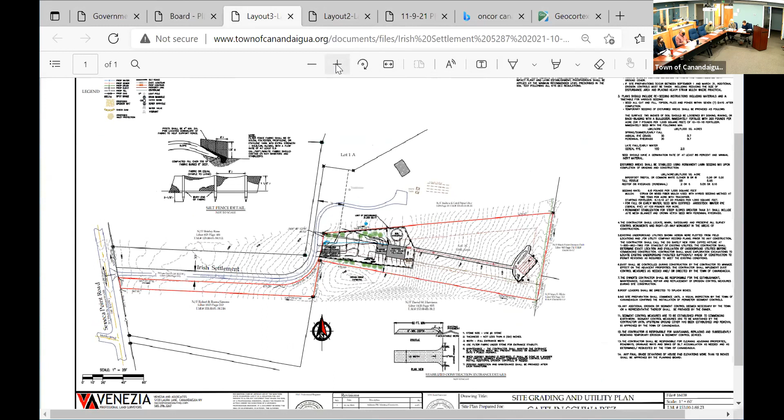We have a new public hearing for Venezia Associates representing Leo Genecco and Sons, owner of property yet to be determined on Canandaigua Farmington Town Line Road, requesting a single stage subdivision approval to create 2 lots on Mobile Road. I will open the application, the hearing.

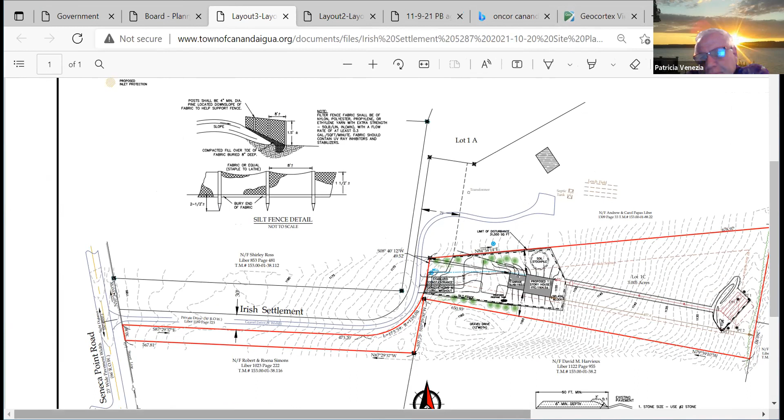Someone here want to speak on behalf of the applicant? I'm here. Rocco, can you hear me? You got the Irish settlement plan up. There we go. Okay, you guys can compete. Who's going to talk? Rocco? I'd rather listen to you, sir. Thanks, Chuck. Okay, Rocco, you got the floor.

Okay, you'll have to excuse me, I thought we had approval of this, but evidently there were quite a few items that had to be addressed, and I believe I've addressed them.

One thing that's peculiar about this is that I keep getting the same comment letter. I make the corrections, I get the same letter back. So I'm not sure where we stand in terms of if we have to add something to the map, or if we're there, or maybe somebody on staff can clarify. But what we're trying to do is add 2 more lots to the end of Mobile Road. We're showing a hammerhead that's temporary because this is going to connect to the new road that's going to be built in the future. So that's where we stand right now.

Somebody, do you want to bring something up while we're here? I'm gonna let Lance do that. So I might need some correction if I'm wrong, but my understanding is that the approval expired. Is that correct, Shauna? Yeah, I will go through the procedural if you want to go through the comments. Sure.

That you had, that's why we're back here. So Rocco, the one question we need addressed on the plans, and I can speak to you offline after the meeting assuming everything moves forward, is that as part of the original approval of this board, remember there were 2 lots being proposed along Mobile Road. As part of that, there's an extension of Mobile Road required to service those 2 lots. In doing so, we need to bring that road up to fire code, meaning it's got to terminate with a hammerhead. That was all being shown before, that was all provided.

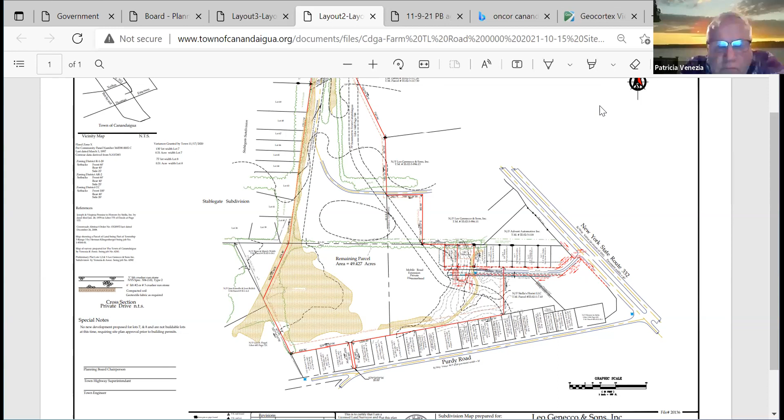We just have to make a few additions as requested by Lance, and if they can make those and get it signed - it's not a different plan than what was before this board. They've been working to address the conditions of approval, and as part of that process time has lapsed, which has required them to come back to this board to get a reapproval, essentially for the same project.

The one item that was missing was we required a 60-foot right of way over Mobile Road for future use. Currently it's shown, but it doesn't connect to our existing easement, so we don't want a gap there. I've asked Rocco to revise the plans to show that 60-foot wide right of way going over Mobile Road all the way to our filed easement that runs north to south from the Genecco property, so there's no gap and no need to go back and get an easement in the future.

Let's move on then. We're ready to take care of SEQRA. It's an unlisted action. I note in part one of the submission, nothing was filled out.

There's another one in the application file dated September 18th, 2020, the one that you gave it to. That's filled out completely and signed by Venezia Associates. You completed part 2 and part 3 - yes, it's essentially the same part 2 and part 3 that was previously completed by this board, just redated.

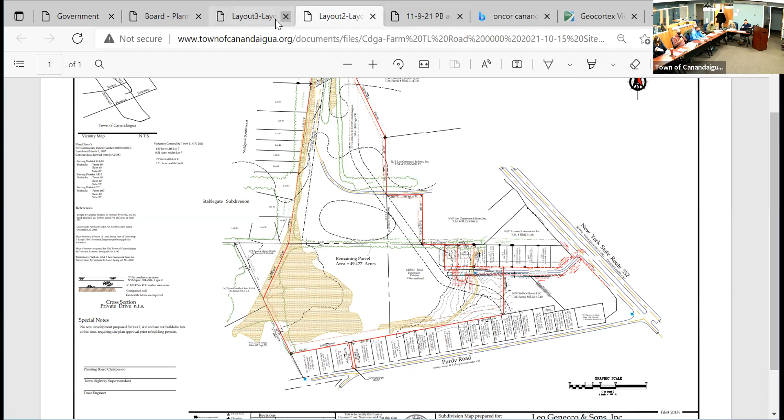We have a new site plan from Venezia Associates representing Caitlin Schwartz on the property at 5287 Irish Settlement, seeking a single stage site plan approval for the construction of a new single family dwelling.

Wi-Fi, where does he zoom in from? I think, let's see, are you in the bunker? He's on the lake. Rocco, can you hear us? We can't hear you.

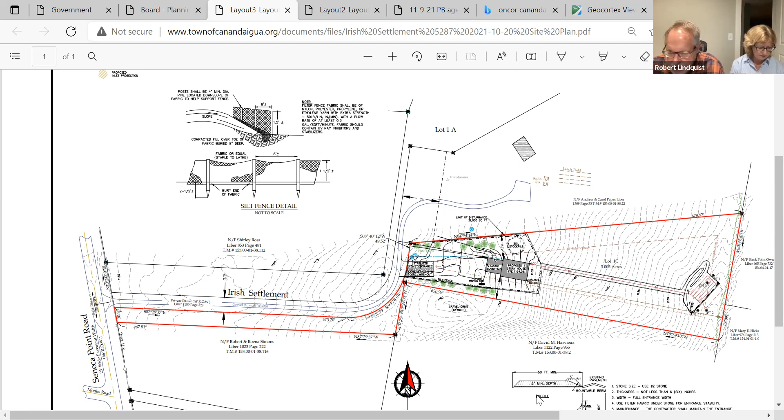Okay, I think we have another neighbor here. I own the driveway. You own the driveway? I'm sorry, what was that? Sir, would you come to the podium and give us your name and address? And hi, Bob. Hi, Barb. Hi, Andy. Hi, Andy.

I own Pat McCabe's old cabin. I'm Andrew Papas, 5285 Irish Settlement. I live in the cabin that Patrick built, and Bob's my neighbor now.

The day of closing, my lawyer called and said there's an addendum: that driveway you have to share with Lot 1A and Lot 1C, the Schwartz's property, and there's an addendum that we're supposed to share one-third the cost of the driveway maintenance each. Bob owned the property for a while, but when he built the house, he took over his share of the maintenance. He's done a very nice job, by the way.

I haven't asked the Schwartzes for any maintenance at this time because they haven't started using it. But that's part of the deed—it says you can't park, you can't go fast on it. Patrick put a lot of conditions into there when he made the subdivision. Even with snow plowing, we have to pay one-third each, but Bob and I have split it because the Schwartzes aren't there yet.

So I have some concerns about the property and the map. Well, should I address those now?

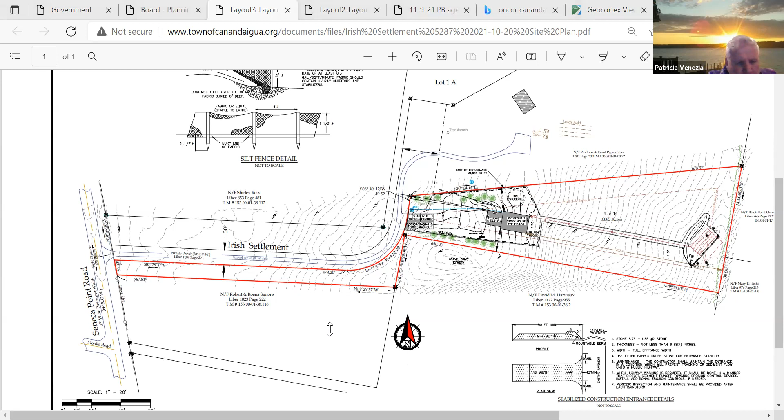Well, again, if the map is accurate—Andy, our obligation is the minimum setbacks. Now if they moved it, as long as it's within the minimum, that's fine.

You back with us, Rocco? No, I'm not here. All right, hang on a second, I'll call on you. That's right, hello. Did they adjust the map? It's adjusted.

Okay, I wanted to put a question. How far is their septic from my well? My well is shown on that map, I didn't see it. I'm sorry, your septic to where? From my well to their septic. Where's your well? Oh, here.

No, that's the leach field. Is there a septic up there? No, the septic is way in the back. They have a distribution box, here's a distribution box, here's the leach field. It's the proper distance away, it's gotta be X number of feet away from the well, and it is. You're good.

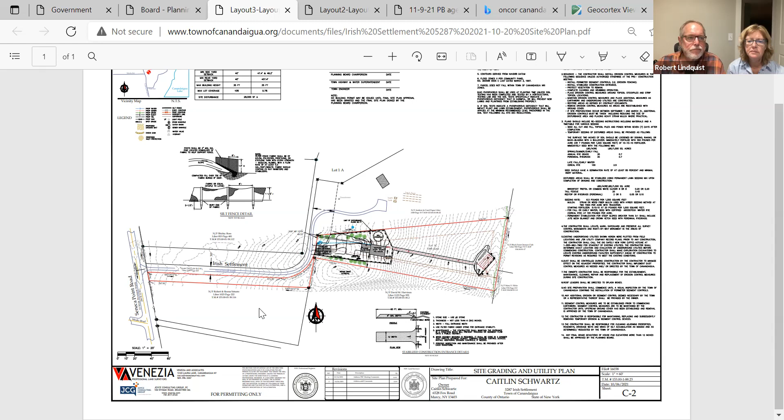Oh, I see, that's typical elevation. Yes, yep. That's what's gonna be a walkout.

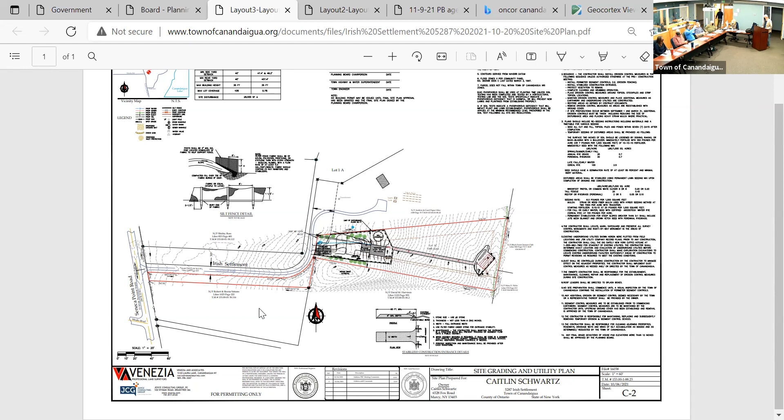Sure, I believe in the plans, if I remember, it says those trees are gonna be maintained. Didn't it say in the plans, the trees both on the north and south side are not gonna be removed? They show them right there on the plan. They're showing it. Both say pine trees to remain, to remain.

Hey Rocco, Rocco, I'm hearing you. He's talking to- no, oh, talking to Lance. You're talking to Lance over there.

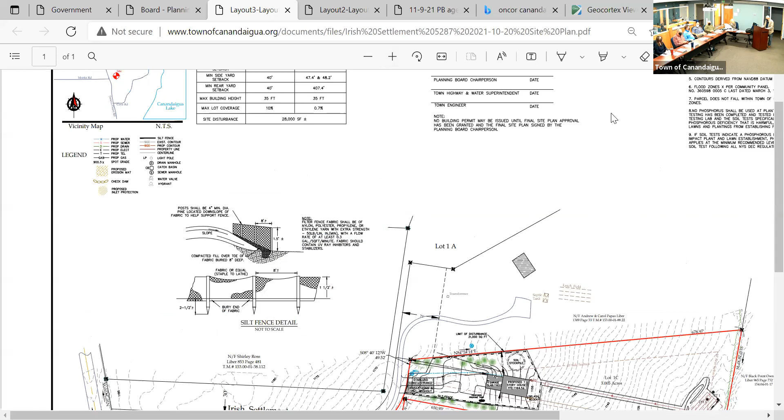All right, yeah, so the plans already indicate that they're gonna remain. They're not gonna take those down. I think you responded to my questions quite well. Thank you, guys, very good.

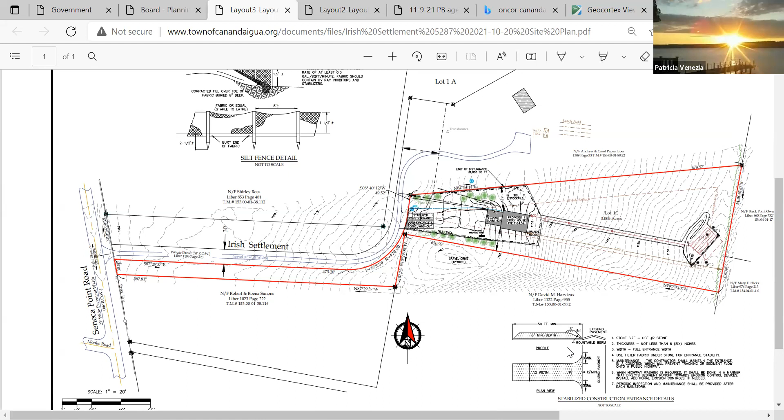So folks, this is kind of a little bit of a redesign. I think you've seen it before. The house sits up front. We got a stabilized construction entrance at the house site. It's a shared driveway, I know there's been some talk going on about that, that's been a few years. And then the septic system is in the rear, way back, that's where we got a decent area to put it in terms of soil. So pretty much that's what's going on, pretty straightforward.

So Rocco, this is Gary, just for the record, the plans show that the trees on the north side and the south side are gonna remain, those pine trees are gonna remain? We planted them for privacy on purpose a few years back, so. Yes. Okay, thank you, max height.

Rocco, what's your max height of the building? I'm not sure exactly what it is, I don't have the elevations in front of me, but I know it's under 35 feet, and it should say up there in the block attributes. It should have it, it's on there. Hold on, I think- yeah, it says, it just said 35.

Less than 35, this is okay, right? Yeah, okay good. Oh, I didn't see this, I think it's a single story structure now, so it's not gonna- right, it's gotta get reflected on the plans, Rocco. Yep, okay, so I thought-

How about Chris Jensen, he had an email he sent out on the 19th of October. You want to read that into the record? Is it defined? Yeah, we're in the findings.

Perc test, yeah, it had to do with the pool for fire. And road driveway size.

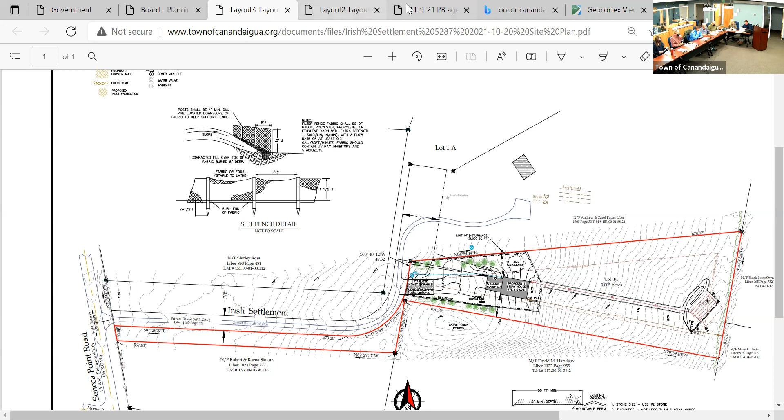Oh good, this is dead on the right. Okay folks, the scenic viewshed overlay district, did everybody read that? Yes. I don't like it. All right, well that's what I was gonna say, tell me what you think of it. Some comments, yeah, my property's on it.

Is it really? So is mine. Johnson Road? So is mine. Yeah, it's I'm not really gonna subdivide mine. Proposal, you could all read.

It would essentially make anything in that purple area subject to a minimum 1 acre lots, and would more or less preclude conservation subdivisions, the way I'm reading it. No, well, as long as the conservation subdivisions were split into 1 acre lots, they can still do it.

And as I read it, they couldn't put multiple - you missed, it couldn't be more than single family dwellings here, not multiple family dwellings. No, they weren't. Oh, you're right, you missed it.